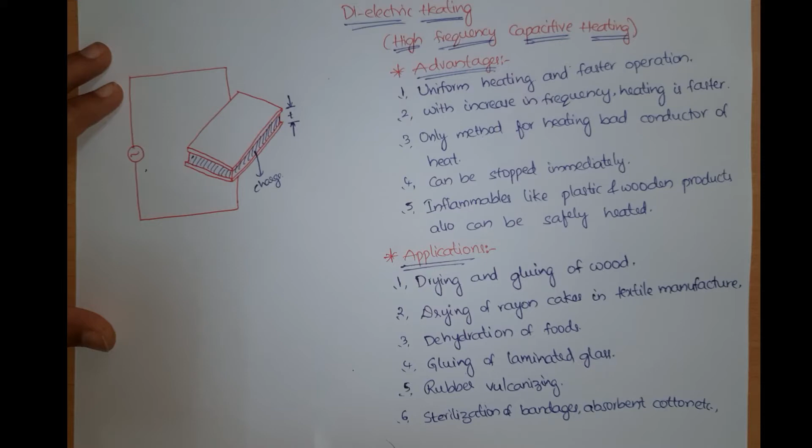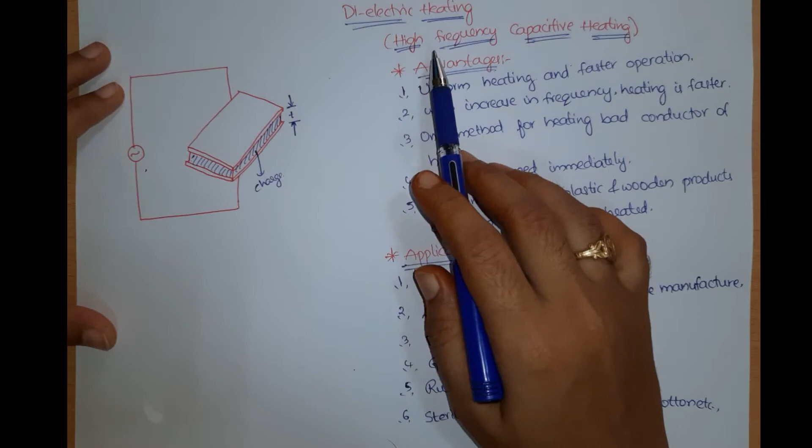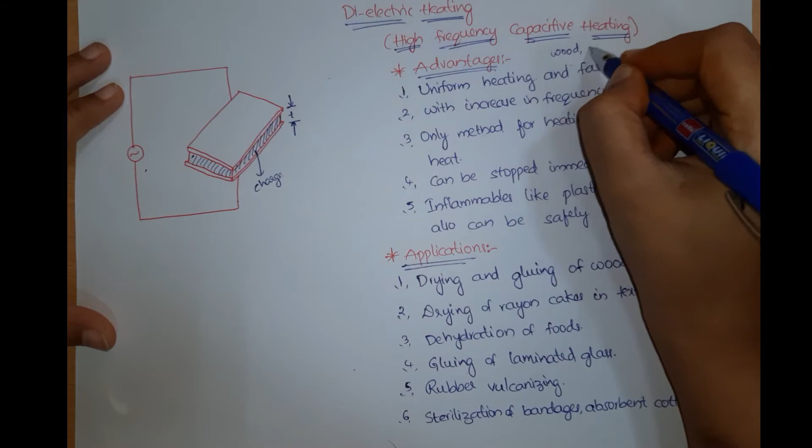Hello everyone, in this lecture let us see what is dielectric heating or high frequency capacitive heating. Dielectric heating is also sometimes called high frequency capacitive heating. This is employed for heating insulators like wood, plastics and all. This is the only method helpful for us for heating insulators or non-conductors. By using this method we can heat insulators uniformly, which is not possible by any other method.

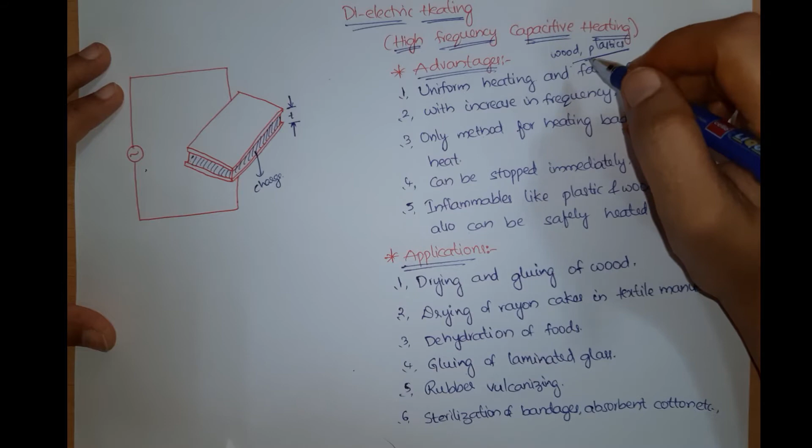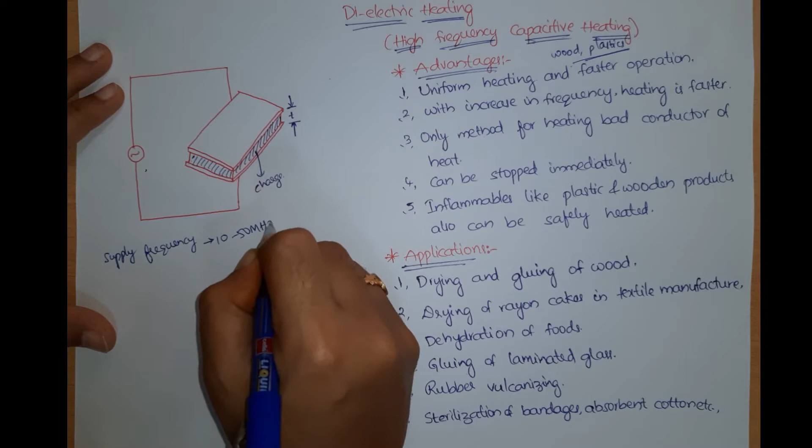The supply frequency required for dielectric heating is nearly 10 to 50 megahertz. That means we operate this dielectric heating furnace at very high frequencies, and the voltage level is up to 20 kV. Coming to the efficiency of dielectric heating, efficiency is nearly 50%. So you can see that the efficiency is very low. The operation of this dielectric heating is done at very high frequencies and voltages.

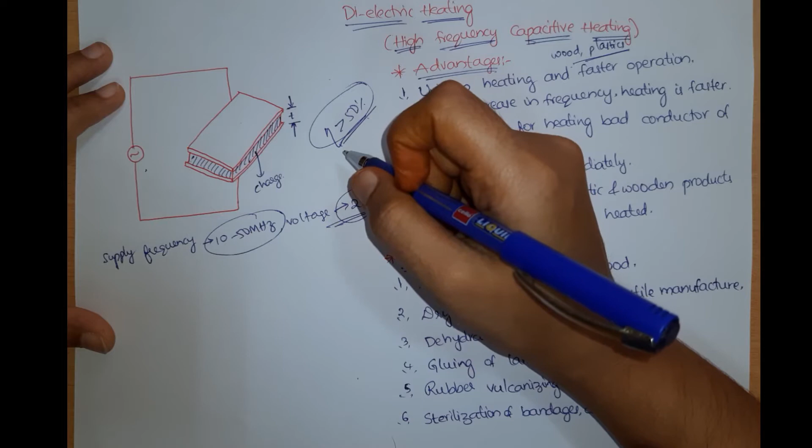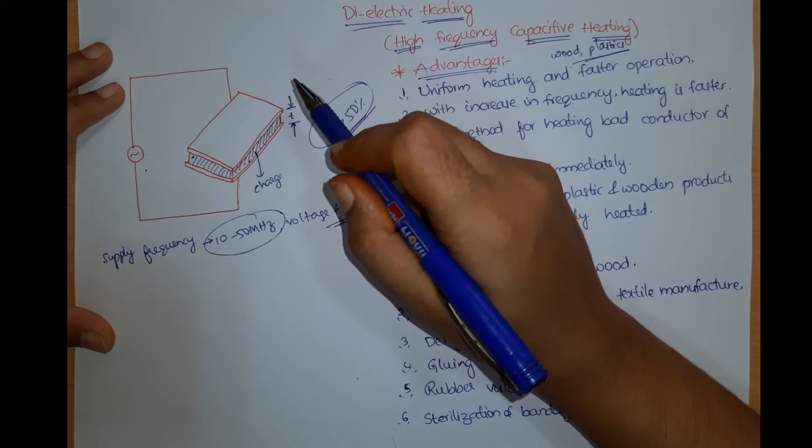Let us now go to the principle of dielectric heating. This is based on the principle of a capacitor. When a capacitor is subjected to a sinusoidal voltage, the current drawn by it is never leading the voltage by exactly 90 degrees. According to the principle, it must lead by exactly 90 degrees, but practically it never happens. So the angle difference between that current and voltage is slightly less. What happens due to that? There is a small in-phase component of the current which produces the required loss for us, which is helpful for dielectric heating. Let us see that in detail.

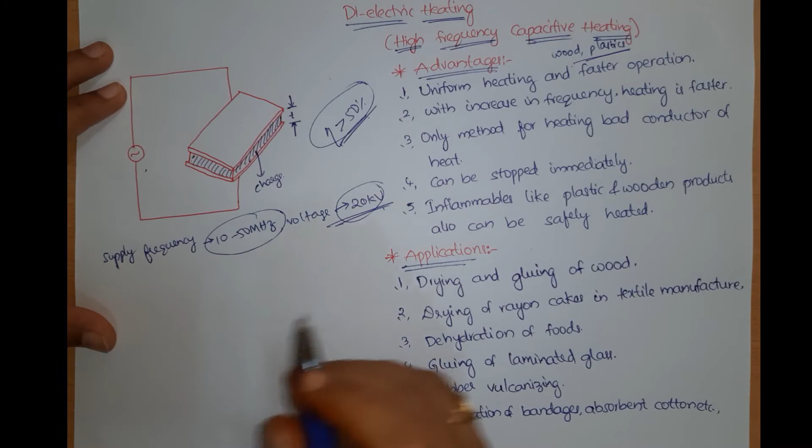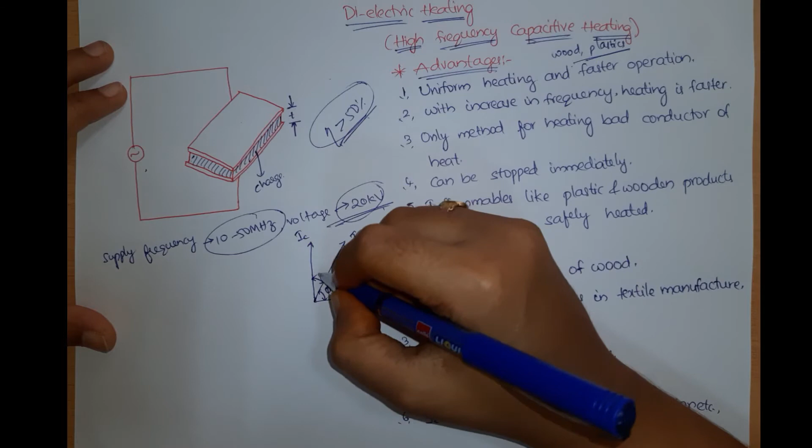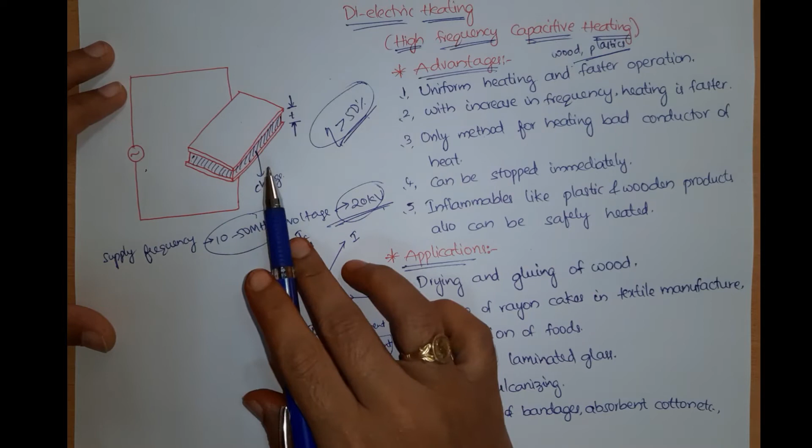If we take this as the supply voltage V, the current must lead this voltage in a capacitor by exactly 90 degrees, but it does not happen. Let us suppose this is the angle between voltage and current in a capacitor. Due to this, if we take its resultant, we will get some in-phase current with the supply voltage V. The remaining component of the current we can take as the charging current. This difference in angle, let us take it as delta, where IC is the charging current and IP is the in-phase current. This in-phase current is responsible for the required losses, due to which we heat a non-conducting material. Let us see how it contributes to the amount of losses.

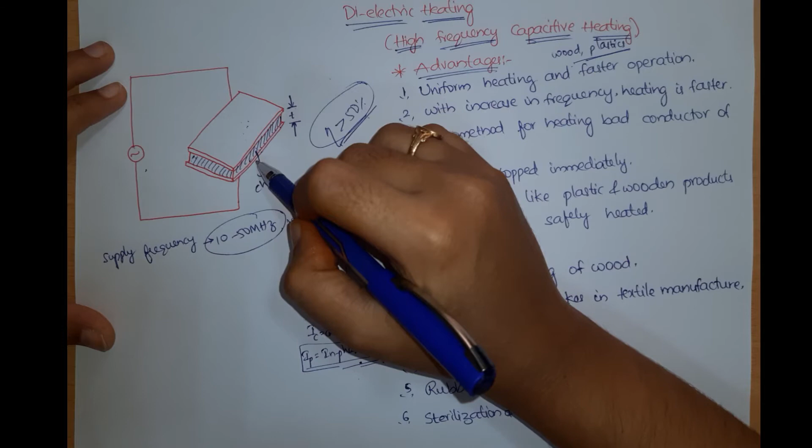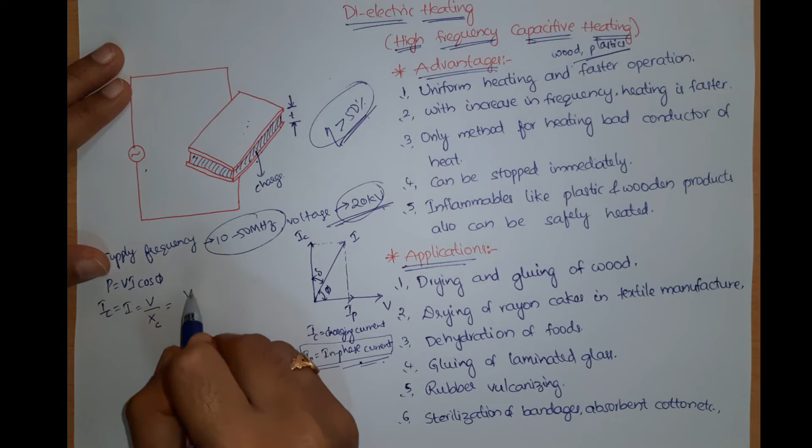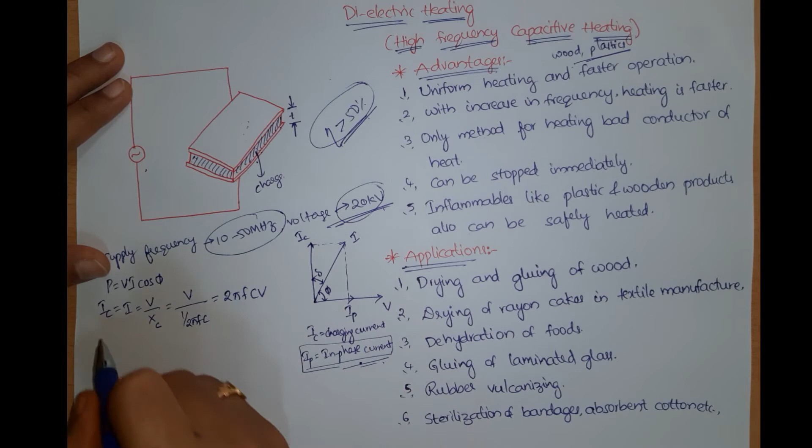The insulating material to be heated is placed between two conducting plates, which form a parallel plate capacitor. Now we can write the power drawn from the supply, P, as V I cos phi. From the phasor diagram we get the charging current IC, which is I = V/XC, where XC is 1/(2 pi f C). So the charging current is 2 pi f C V. Then P = V × 2 pi f C V × cos phi, which gives 2 pi f C V squared cos phi, where phi is 90 degrees minus delta.

This phi is total 90 degrees minus delta, which implies cos phi is cos of (90 minus delta), which can be written as sin delta, or as tan delta. Here delta is very small, as we have already discussed that the current is not leading the voltage by exactly 90 degrees, but there is a small angular difference between those two. For such a small angular difference, I can consider tan delta equal to delta. So now I can represent P = 2 pi f C V squared delta, in watts.

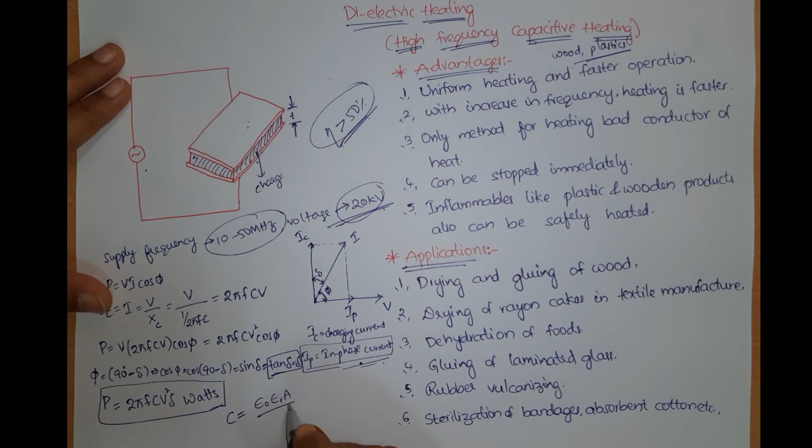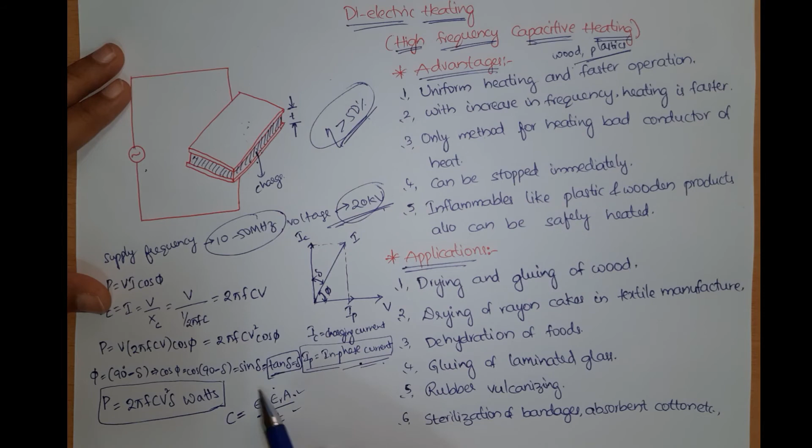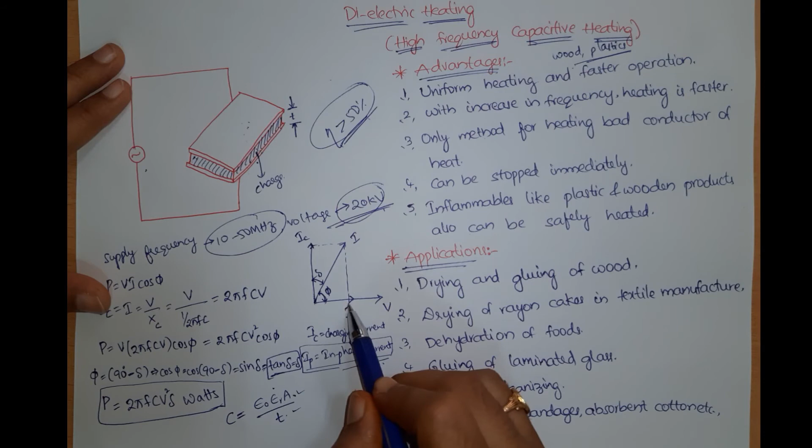Here C, the capacitance of the plates, can be written as epsilon naught epsilon R A by T, which is the formula for capacitance, where T is the thickness of the dielectric and A is the area of the dielectric material used. Epsilon R is the relative permittivity, and epsilon naught is the absolute permittivity of vacuum. This is the principle used in dielectric heating. The component of the current which is in phase with the supply voltage, since the current does not lead the voltage by exactly 90 degrees, produces a loss which is made use of in dielectric heating. This power will be converted into heat.

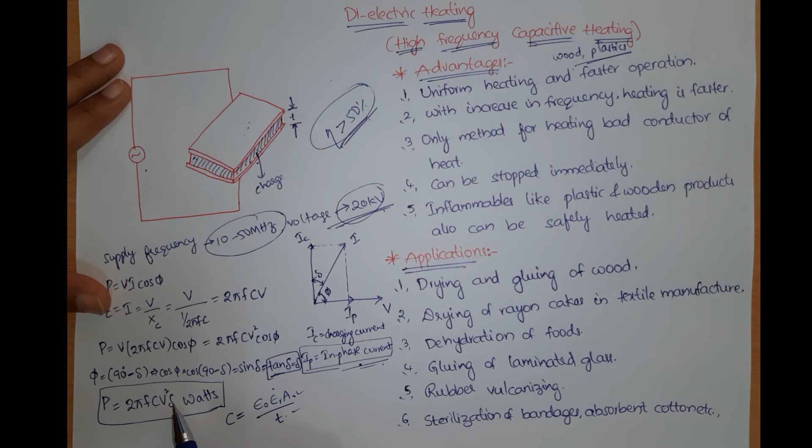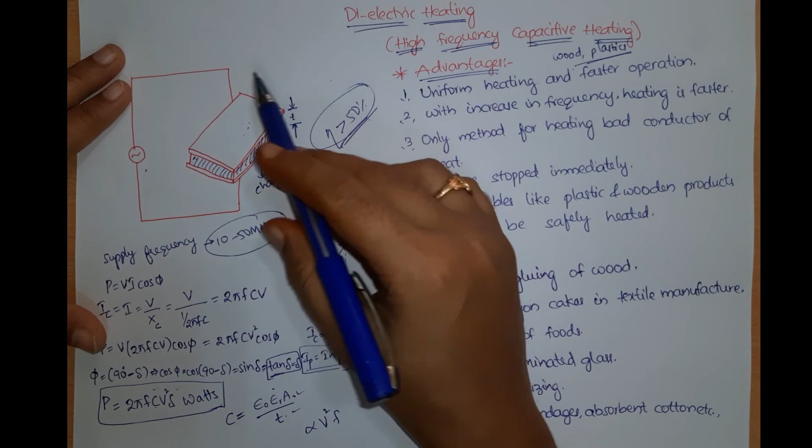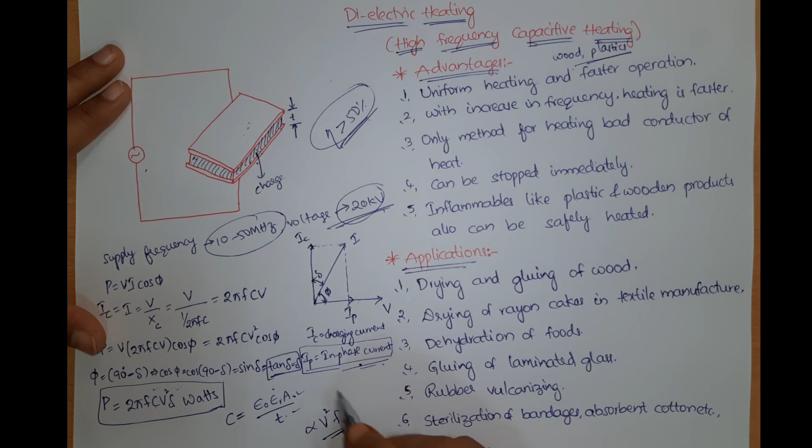For a given insulating material, C and delta are constant. So the dielectric loss is proportional to V squared f, since C is constant, delta is constant, and 2 pi is constant. By varying these two variables, we can vary the amount of heat produced in dielectric heating. That is why dielectric heating is done at very high voltages and high frequencies. This is the reason for the high frequency used in dielectric heating.

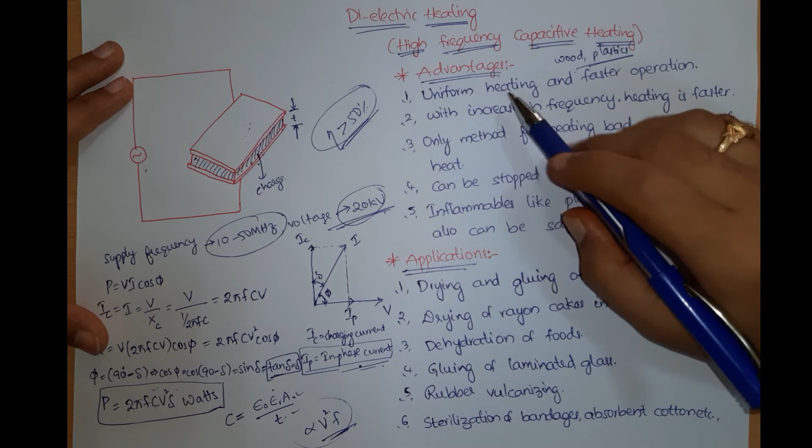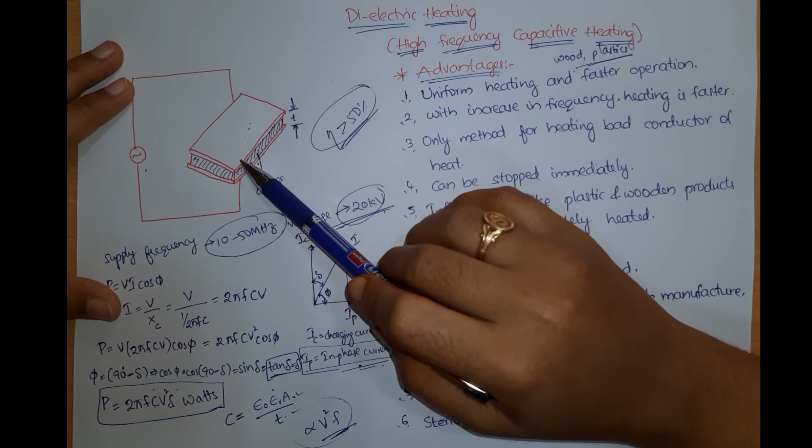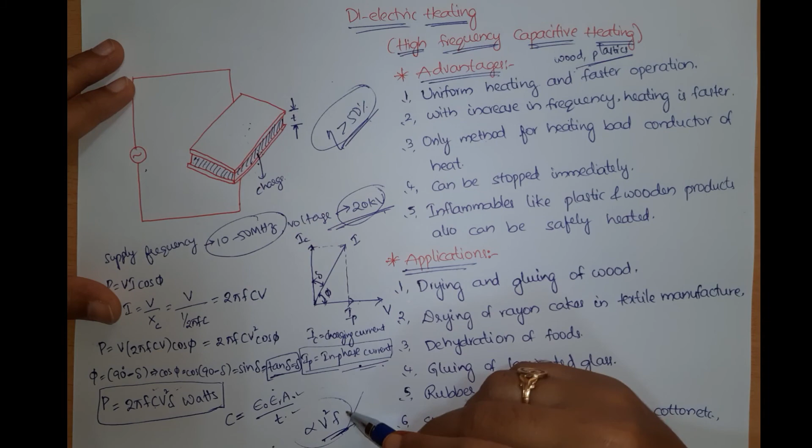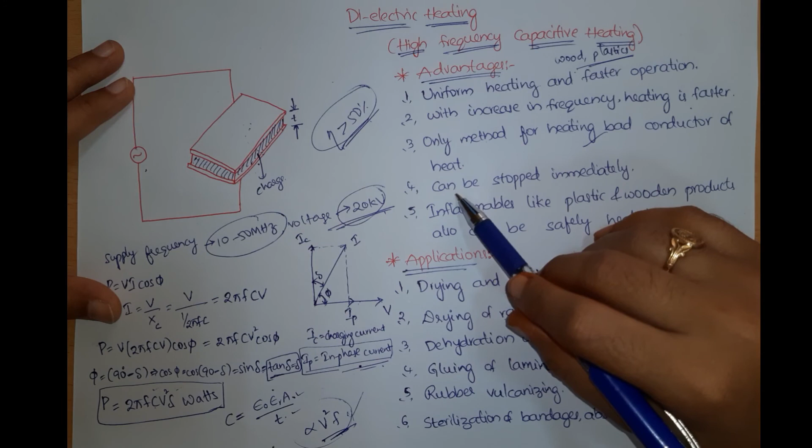Coming to the advantages of dielectric heating. Uniform heating of the material is produced, because the two plates are given supply equally from the top and bottom, so the heat produced throughout the material between those two plates is uniform. Faster operation can also be achieved: with an increase in frequency, heating is faster, since the dielectric loss produced is proportional to frequency. This is the only method of heating bad conductors of heat, as we have already discussed. This heating can be immediately stopped by stopping the supply given to it. By using this method, inflammables like plastic and wooden products can also be safely heated.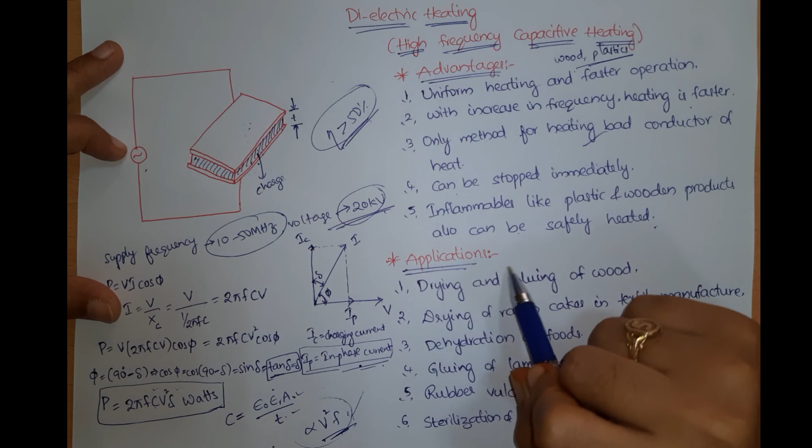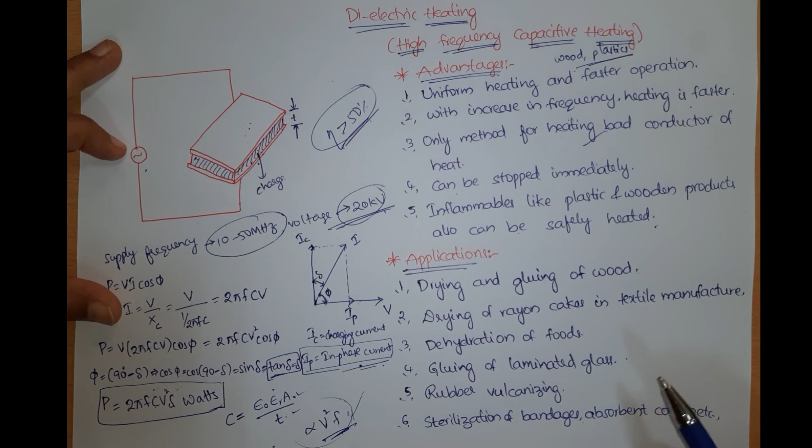Coming to the applications of dielectric heating: drying and gluing of wood, drying of rayon cakes in textile manufacturing, and dehydration of foods. This method can also be used for gluing of laminated glass, rubber vulcanizing, sterilization of bandages, absorbent cotton, etc. So this is all about dielectric heating. Hope you have understood the concepts. Thank you.